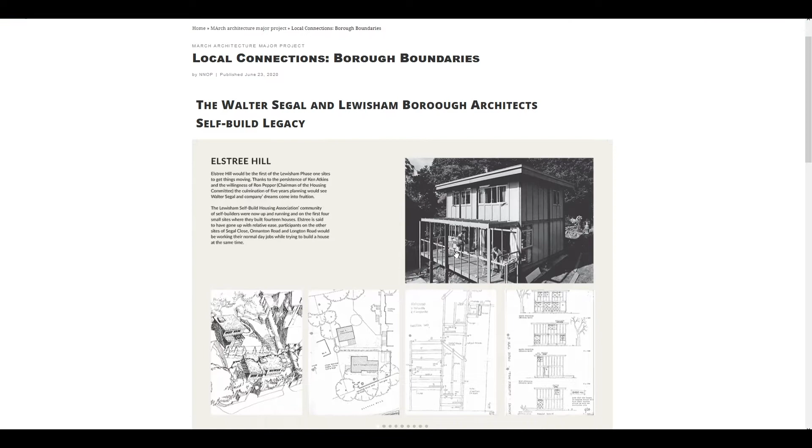There we are, that's Anne Kennedy, John Broom and myself at the London Festival of Architecture exhibition, Local Connections, Borough Boundaries, curated by Anne and myself on behalf of Rural Urban Synthesis Society. The idea was to showcase 30 years of community-led housing in Lewisham to gain further support from the local authority. My role was to gather content and start designing the exhibition. It was such a joy to pursue a personal interest while contributing to a worthwhile project.

I didn't realise at the time the extent of Walter Segal's self-build legacy until I had a cup of tea with John, where he gave me a map and a list of key players who would help me build this narrative, one of them being Tim Ashodi of Nubia Way.

During the exhibition I was approached by Matthew Ponsford, a journalist writing an article for The Guardian on Nubia Way and the struggles faced by the community there. He wanted me to share some of my research to help him with the article. After working with Matthew, I decided to ask Tim if he'd be interested in me working with him and the Nubia Way residents for my major project.

That's down there highlighted in red at the south of Lewisham, with Nubia Way being on the edge of the Whitefoot playing fields. While working as an architectural advisor for the Downham Dividend Society, a CLT recently founded by Tim, at CSM it was the start of Making Week.

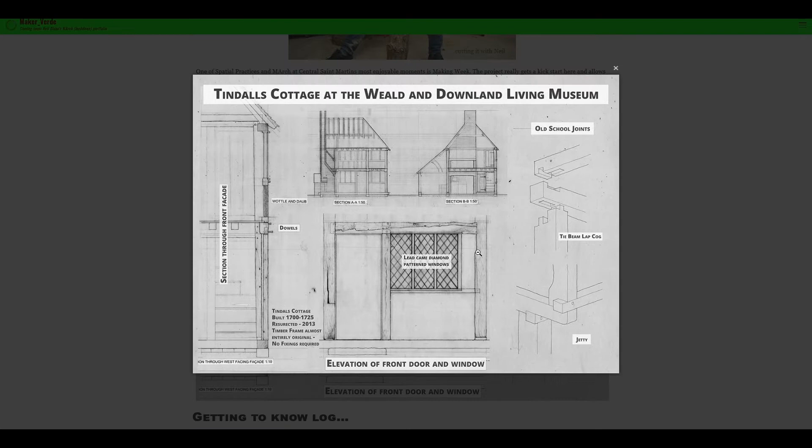This is when I decided I wanted to work with green oak. After trying to source some square edge timber from multiple different south of England sawmills, I realised my budget wouldn't stretch that far and decided to pursue alternatives.

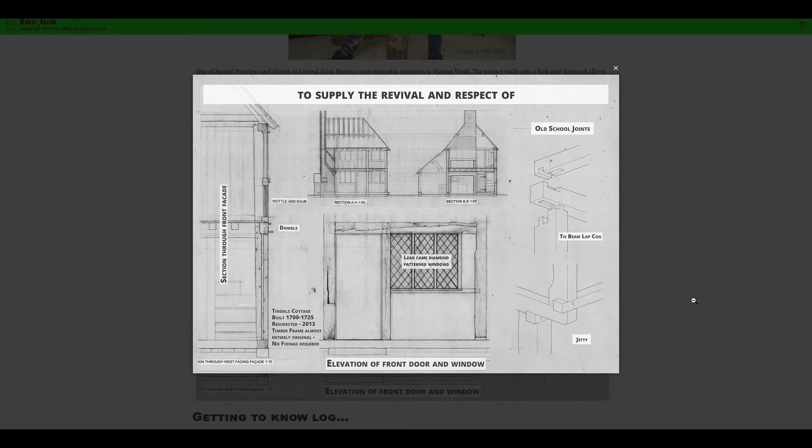This led me to Tunbridge, following the discovery of a website called Woodnet, which is a directory of felled timber that people need taking away. Half of the struggle with the timber is the haulage, and people actually have to pay to get rid of it.

Through Woodnet, I found a recently felled 300-year-old oak tree. Peter was selling it by the cubic metre, but was keen for me to have some after discovering what it was going to be used for, as long as I shared the output. It was a pleasure meeting Peter, who shared with me stories of life in the Jura and his woodland responsibilities there. The video playing shows me working with the oak.

At first my intention was to work solely with hand tools. This was partly because it was the end of term and the workshops were closed, but was also a desire to see how far I could get in the interests of the climate emergency and environmental concerns.

An earlier theme I touched upon was the bodily interaction with the material. Since researching Bernard Leach and Shoji Hamada for Unit 1, I discovered a real working relationship between the human and the natural material, a connection of the human body and a product of the earth. This theme only strengthens my relationship with timber.

It's not just the ecological benefits that interest me, but the social, economic and health benefits associated as well. Timber doesn't just benefit the user, but is also a pleasure to work with.

I've worked with tree surgeons in the past, and for every tree that was felled we planted ten. This is where I first discovered the energy felt while working with this material. The revolving joint there will later inform my proposal.

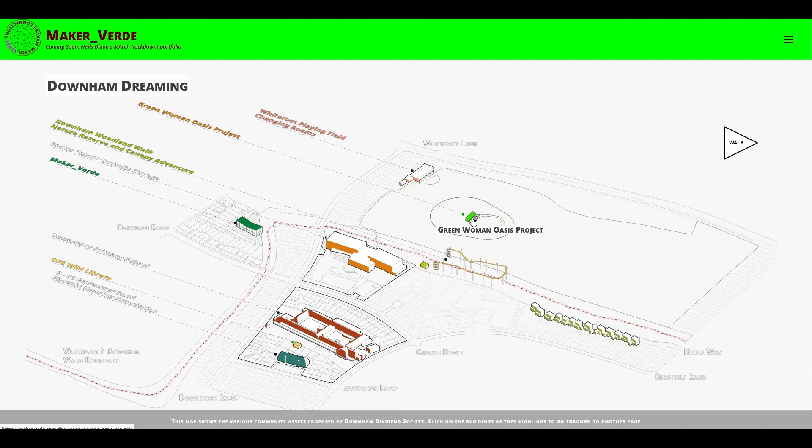The dream for the CLT is to construct a series of five community-oriented projects around the Whitefoot playing fields that will offer local participation in an effort to create social value and a sense of ownership over the amenities in the area. This is where my proposal comes in. The five strands are the idea of the Downham Dividend Society.

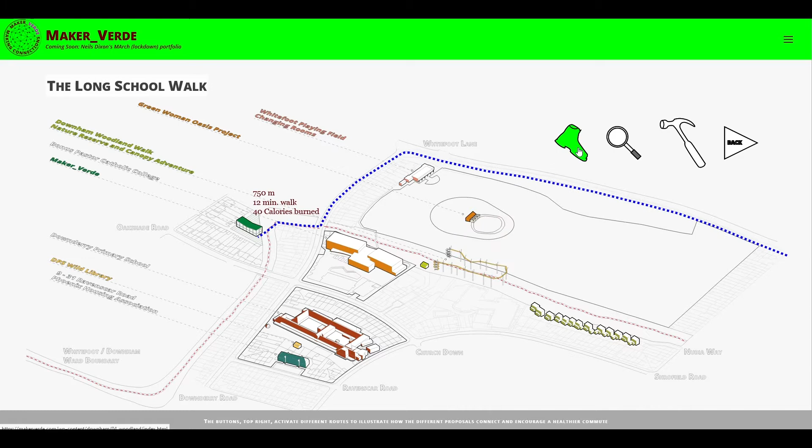In order to strengthen participation in these projects, I'm proposing the Maker Verde School of Timber, in an effort to facilitate localised paths into employment and negate the need to travel to the city for work. An issue I've been aware of for some time now is the construction skills shortage in the UK and the barriers that stand in the way of people trying to get into the industry.

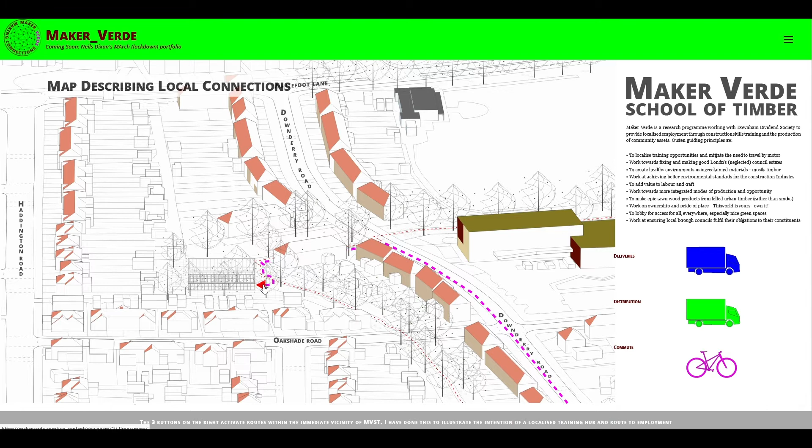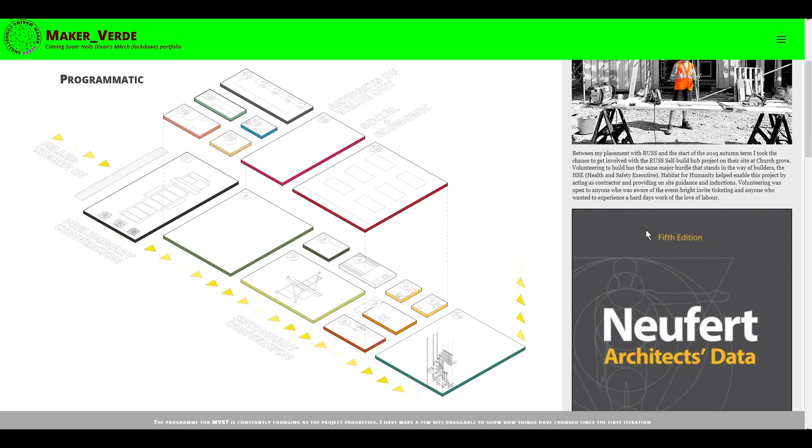There are plenty of schemes out there working hard to alleviate the shortages, one of them being the Lewisham Construction Hub, part of the Mayor's Construction Academy. Here people can apply for jobs that provide training and qualification to enable them onto the building site. Just to get a Construction Skills Certification Scheme card, the CSCS card, you now need an NVQ that takes about a year of study and costs almost £500. This is the main barrier, and the Mayor's scheme is looking at ways to help applicants gain these.

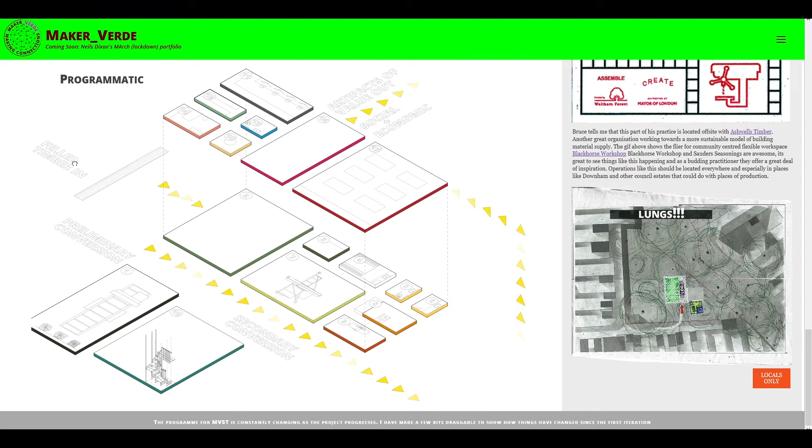While looking at the Lewisham Hub and the jobs there, I discovered that the majority of jobs advertised were outside of Lewisham, meaning at least an hour's worth of travel. This, now more than ever, is quite off-putting for a would-be labourer.

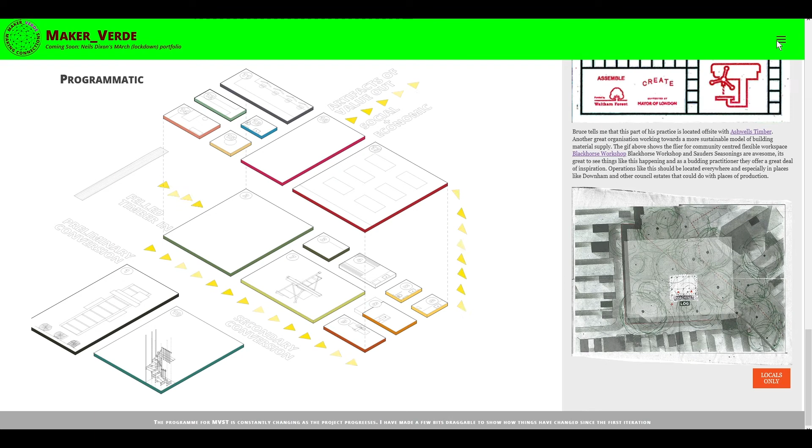So this diagram shows the programme. At first I wanted to use primary conversion and secondary conversion for the timber. After speaking to Bruce Saunders of Saunders Seasonings from Assemble's Blackhorse Workshop, I decided to take the sawmill out and just have secondary conversion and some learning facilities.

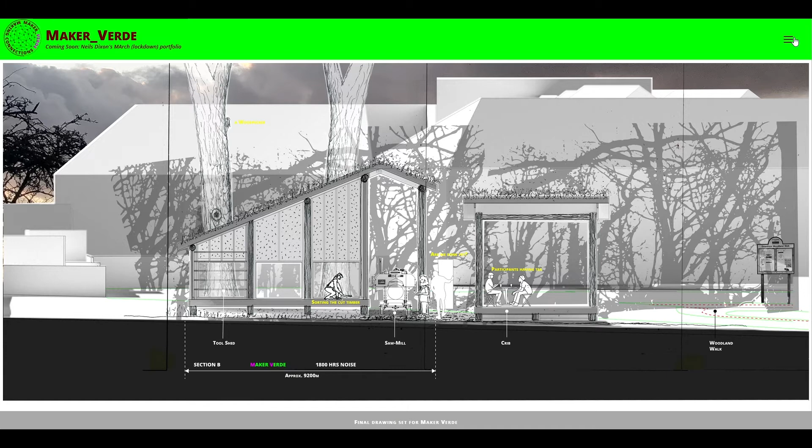So following further developments, the diagrams here show an ancillary welfare facility building with the sawmill in front of another building, which is a drying room or storage area for the felled timber, in an area that might not necessarily be conducive to the biodiversity of the woodland.

So from here I move on to some interior views of the Maker Verde School of Timber and the lessons that would be taught within the classroom. Here we see a diagram showing the importance of trees within the urban environment. These lessons would be taught in addition to construction skills.

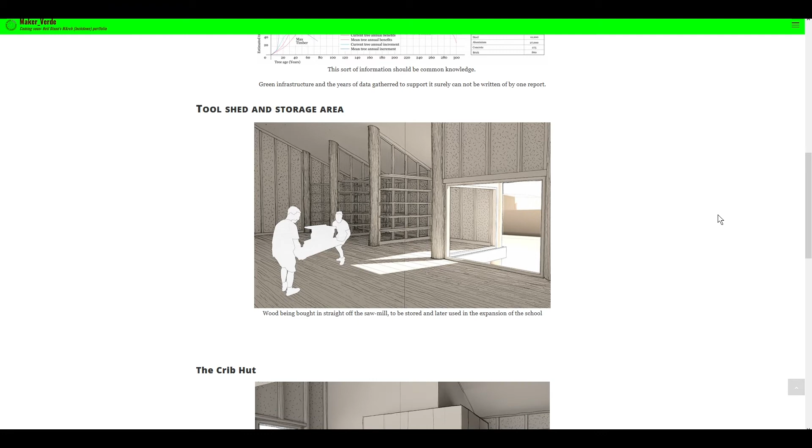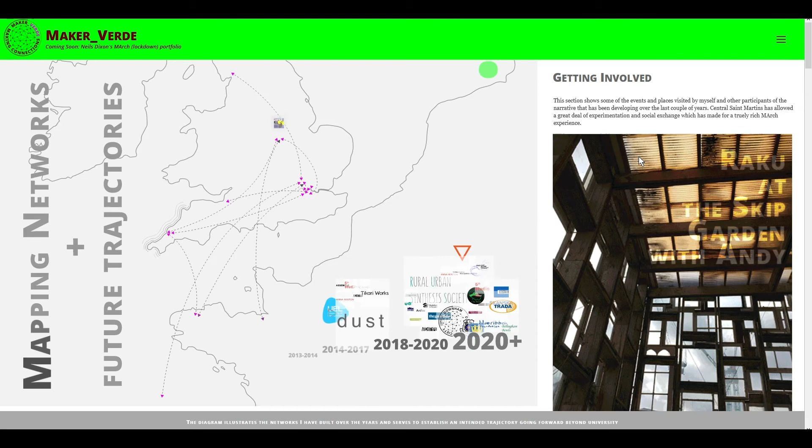And throughout Unit 5 I plan on expanding my network with associations like Trees for Cities and looking more in depth into the value of trees, following recent reports that the CO2 reductions might not be as significant as first thought. So to finish up, here's the network and future trajectories page.

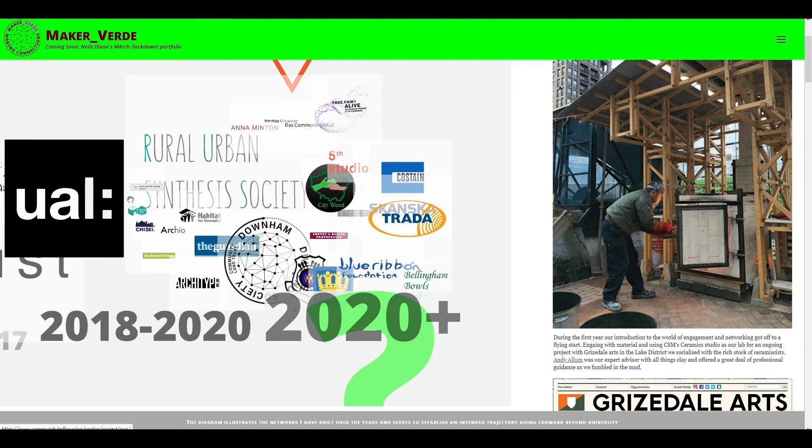It shows the path right through from before attending college, through UEL and onto UAL. On the right there's a scroll bar with some imagery that shows some of the actors that I've met along the way, and these areas are all clickable, and you can click on the periphery of each of those clusters to zoom in.

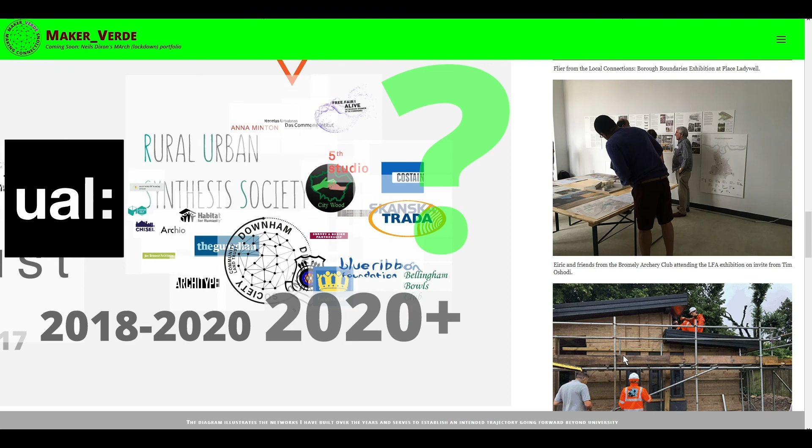The big green question mark is kind of symbolic of the unknown future. Where do I go from here? I'd like to pursue my interest in timber and create more networks with forestry associations in order to enable the supply of felled timber for community-led projects.